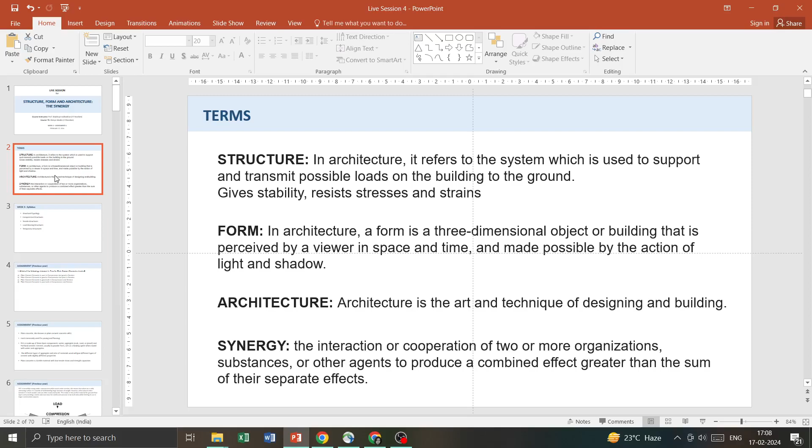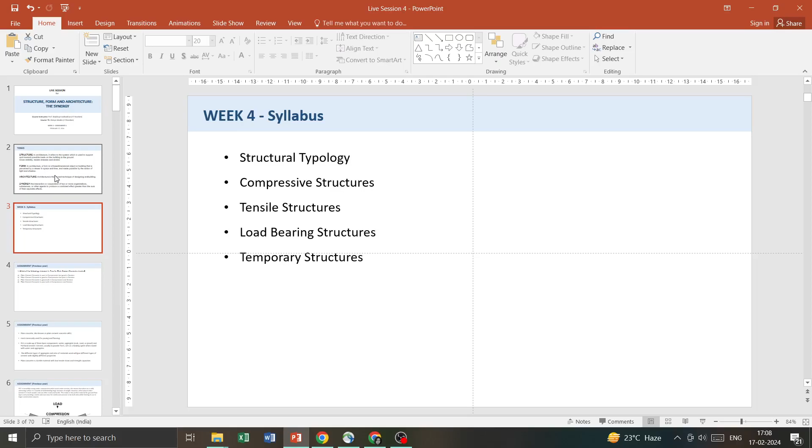Week 4 syllabus was structural typology, covered over 5 lectures. First was structural typology, second was compressive structures, third was tensile structures, fourth was load bearing structures, and fifth was temporary structures, in which scaffolding and raking was covered.

Without any further ado, we will start with the questions of Assignment 4. Which of the following statements is true for plain cement concrete structure? Plain cement concrete is poor in compression but good in tension. Plain cement concrete is good in compression but poor in tension. Plain cement concrete is good both in compression and tension. Plain cement concrete is poor both in compression and tension.

So what is plain cement concrete? Plain concrete, also known as plain cement concrete or PCC, is most commonly used for paving and flooring. PCC is made up of 3 basic components: water, aggregate (rock, sand or gravel), and cement. Cement, usually in powder form, acts as a binding agent when mixed with water and aggregates. The different types of aggregates and ratios of materials used give different types of concrete with slightly different properties. Plain concrete is a brittle material with low tensile strain and strength capacities.

PCC is incredibly strong under compression whilst weak under tension. This means that on a solid, unmoving surface, it is capable of withstanding huge amounts of weight. However, when placed under tension, it is much weaker and can often crack and buckle. This makes it the perfect material for ground floor layers and for providing a stable and even base for reinforced concrete to be built onto, while limiting its use in larger construction projects.

So what happens in PCC is that it has incredible compressive strength, meaning that if load is put on the PCC, it would be able to handle that load. But if PCC is put under tension, which means it's being stretched apart, it will buckle and crack. So it is weak under tension, which makes it a great layer for ground floors and for providing a stable base for RCC. But because of its inability to withstand tension, it is not that great to use as PCC alone in larger projects.

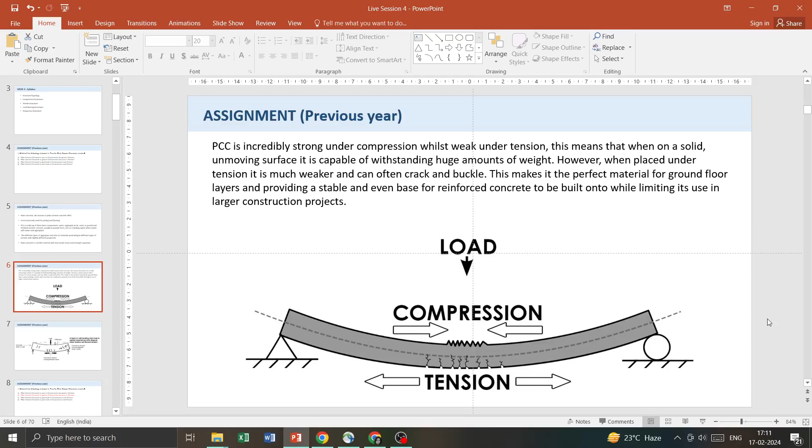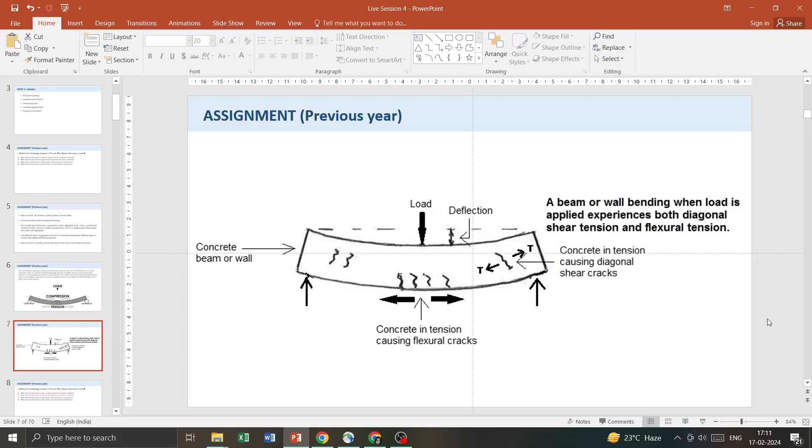This is another image which shows that when a load is put on a beam or wall, it experiences deflection. So when a load is put on a beam of, imagine, plain cement concrete, deflection occurs, and the concrete in tension causes cracks, while the concrete in compression only buckles from the top.

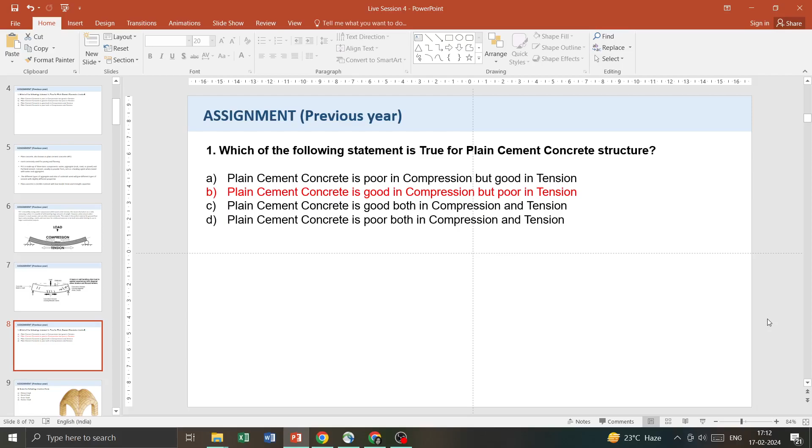So the question was, which of the following statements is true for plain cement concrete structure? The answer is that plain cement concrete is good in compression but poor in tension. It has good compressive strength and can take load, but it has bad tension. It is bad under tension, meaning that if concrete is pulled apart by any load, it will crack and break. It becomes brittle that way.

Ribbed vault: a ribbed vault is an architectural feature comprising a framework of crossed or diagonal arches or ribs - the skeleton of arches or ribs - on which masonry can be laid out to form a ceiling. Variations of ribbed vault were used in Roman architecture, Byzantine architecture, Islamic architecture, Romanesque architecture, and especially Gothic architecture.

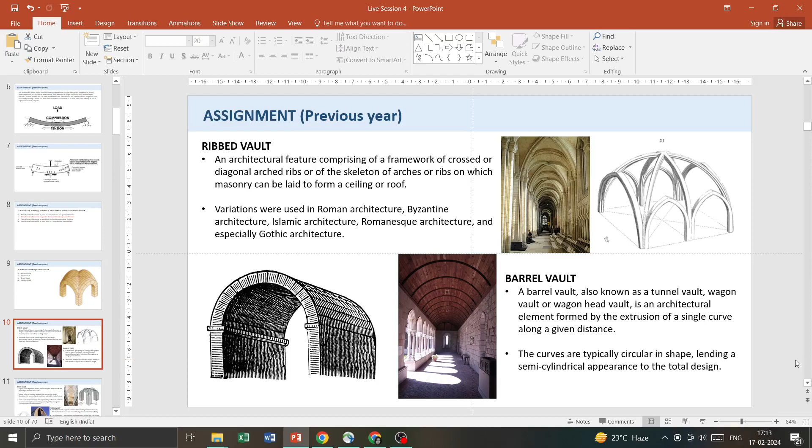Barrel vault, also known as tunnel vault, wagon vault, or wagon head vault, is an architectural element formed by the extrusion of a single curve along a given distance. So a barrel vault is basically one arch that is repeated, or stretched along a length, creating a barrel-like, semicircular structure. The curves are typically circular in shape, giving a semi-cylindrical appearance to the design.

Groin vault: a groin vault or groined vault is produced by the intersection at right angles of two barrel vaults. Imagine two semi-cylindrical vaults put at intersection with each other - the shape generated by that intersection at right angles is a groin vault. Groin refers to the edge between the intersecting vaults. Sometimes the arches of groin vaults are pointed instead of round. Groin vault construction was first exploited by the Romans, and it is difficult to construct neatly because of the geometry of the cross groins.

Then the Nubian vault. A Nubian vault is a type of curved surface forming a vaulted structure. The mud brick structure was revived by Egyptian architect Hassan Fathy. The technology is advocated as environmentally friendly and sustainable since it makes use of pure earth without the need of timber. One key advantage of the Nubian vault is that it can be built without any support or shuttering - the earth bricks are laid leaning at a slight slope against the gable walls in a lengthwise vault.

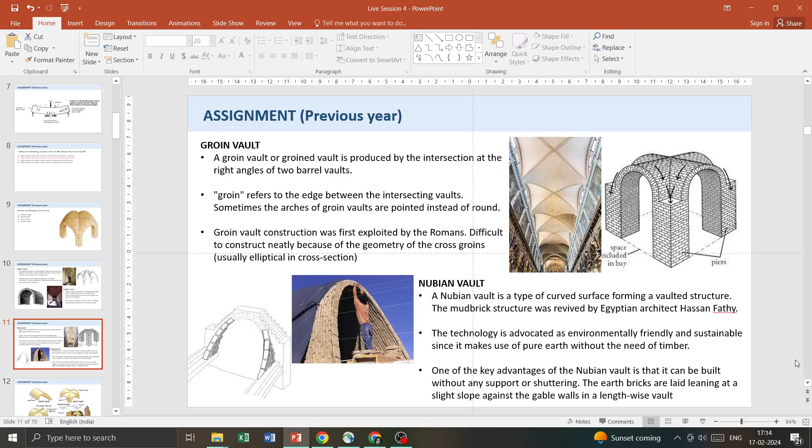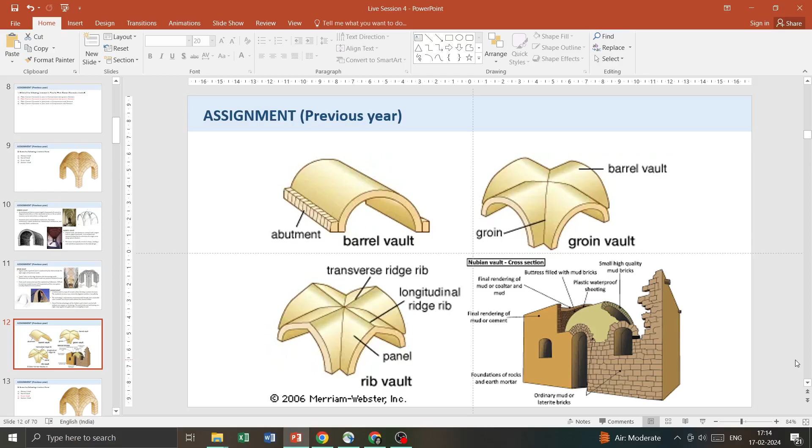So now adding all four images here: this is a barrel vault, that is a groin vault, and this is a rib vault, and this is a cross section of a Nubian vault. So coming back to our question - name the following structural form. This is a groin vault.

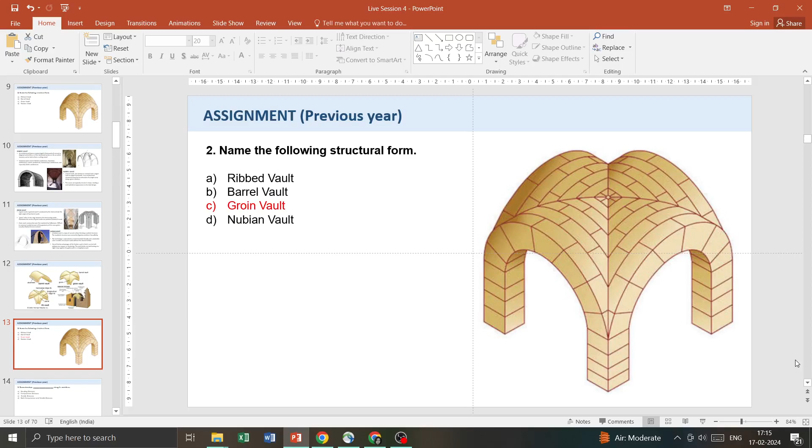Question number 3: a dome develops what along its meridian - bending stresses, compressive stresses, tensile stresses, or both compressive and tensile stresses? In domes, there are two types of forces that occur: meridional forces and hoop forces. Hoop forces are the concentric circles from the base of the dome to the top, and meridional forces are the meridians running from the center to the base of the dome.

Domes are self-supporting structures that take the form of an arch, distributing external loads around the sides and down to the foundations. They are tightly compacted by gravity, and external loads are carried by internally developed compressive forces. The analysis of a dome shell is concerned with two stresses: the stress acting in the meridional direction and the stress acting in the parallel, or hoop, direction. Hoops are parallel semicircles from the base of the dome to the top, and meridional forces run from the top of the dome to the base in the longitudinal direction.

In this image, red marks the meridional compressive force, dark blue marks the hoop compressive force, and light blue marks the hoop tensile forces. So the answer is that a dome develops compressive stresses along its meridians. In the case of a dome, compressive stresses are developed along the meridians, but along the hoops - the parallel circles to the base of the dome - both compressive and tensile stresses are developed.

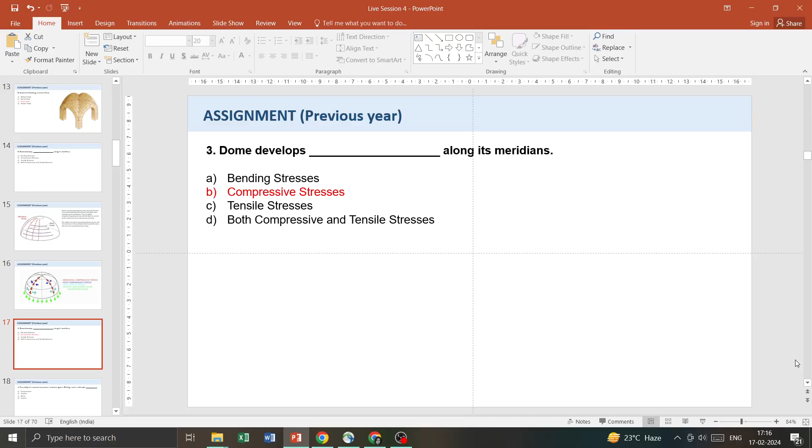Question number 4: the ability of a material to prevent structure against pulling load is referred to as compression, tension, shear, or torsion - the ability of a material to prevent structure against pulling load.

So let's go to the definitions. Compression force, or compressive force, occurs when a physical force presses inward on an object, causing it to become compacted. In this process, the relative positions of atoms and molecules of the object change. This change can be temporary or permanent depending on the type of material receiving the compressive force. So compressive force is when you push it together - when this push inward force is applied inward on an object.

Shear force is a force acting in a direction that's parallel to, or over the top of, a surface or cross section of a body, like the pressure of airflow over an airplane wing. The word shear refers to the fact that such a force can cut or shear through the surface or object under strain.

Then tension - tension is described as a pulling force. It's a force that is pulling the object.

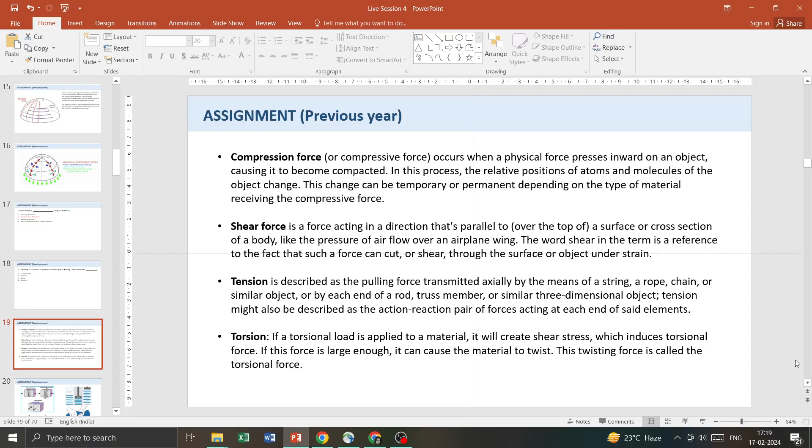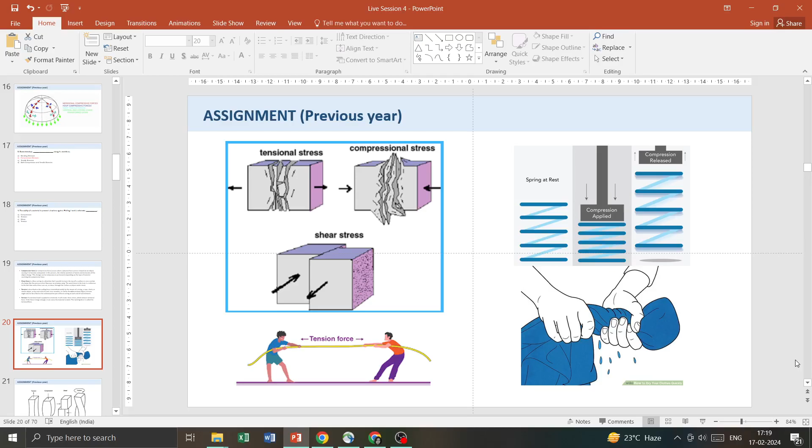So here are some examples. In tension stress, the object is pulled apart and it breaks. In compression stress, the object is pushed together and it breaks. In shear stress, it can shear. And a few more examples of compression, tension, and torsion.

This image explains all four types of forces very clearly: tension, compression, shear, and torsion. In tension, the object elongates. In compression, the object compacts. In shear, the object shears or divides. In torsion, the object twists.

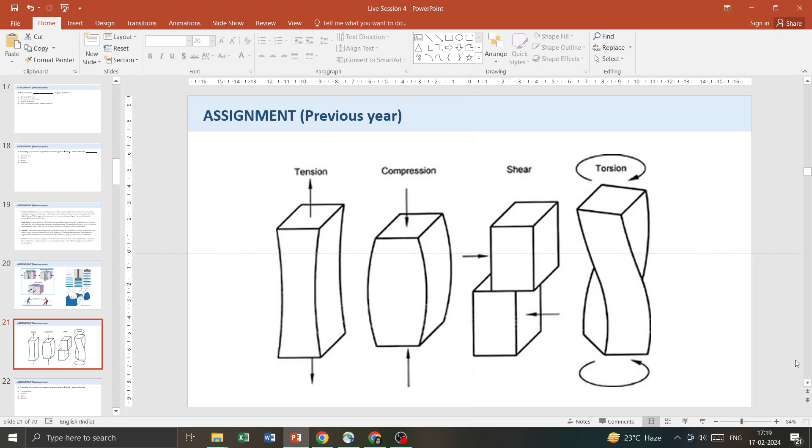So our answer is: the ability of a material to prevent the structure against pulling load is referred to as tension. So here we are talking about pulling load. A material which can prevent the structure from breaking against a pulling load is tension.

Like we discussed in the previous question, concrete or PCC has bad tensile strength. If a pulling load is applied on it, since it has bad tensile strength, it will become brittle or create cracks. However, it has good compressive strength, so if it is pushed together, it will be able to take up that load. Question number 5.

The McCormick Place in Illinois is an example of: trussed tensile structure, pneumatic tensile structure, cable suspended tensile structure, or stage tensile structure.

So what is a trussed tensile structure? A truss is a structure that consists of members organized into connected triangles so that the overall assembly behaves as a single object. Trusses are most commonly used in bridges, roofs, and towers. A truss is made up of a web of triangles joined together to enable the even distribution of weight and the handling of changing tension and compression without bending or shearing.

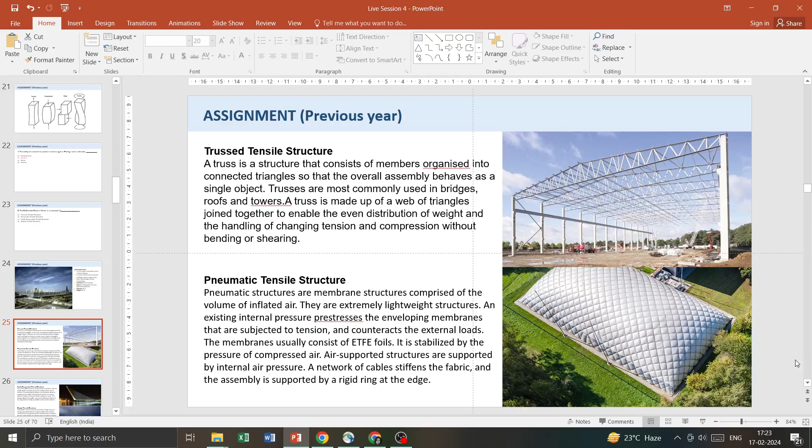So what happens in a pneumatic structure is that it's a volume of inflated air. They are extremely lightweight structures, and the structure is maintained by creating pressure through internal air pressure. It's a fabric, usually made of ETFE foil, and the shape is maintained by internal air pressure. They are membrane structures, and that's why they are tensile structures.

Cable suspended tensile structures: the main pillars act as compression members, but the whole load is carried out by the cables, which are in tension. A suspended structure is a structure supported by cables coming from beams or trusses which sit atop a concrete center column or core. The design allows the walls, roofs, and cantilevered floors to be supported entirely by cables and the center column.

So what happens in a cable suspended tensile structure is that the main cables or main pillars are compression members, and the whole load is carried out by the cables, which come from the compression member or compression column to the structure.

For example, in bridges, it's a suspended structure supported by cables coming from beams or trusses which sit atop a concrete center column or core. So there would be one column or core of concrete, and these cables come out of that structure and support the base or wall. This design allows the walls, roof, and cantilevered floors to be supported entirely by cables and a center column. The entire load or floor is supported by the cables. The cables have tensile strength which support the whole load, while the pillar only has compressive strength.

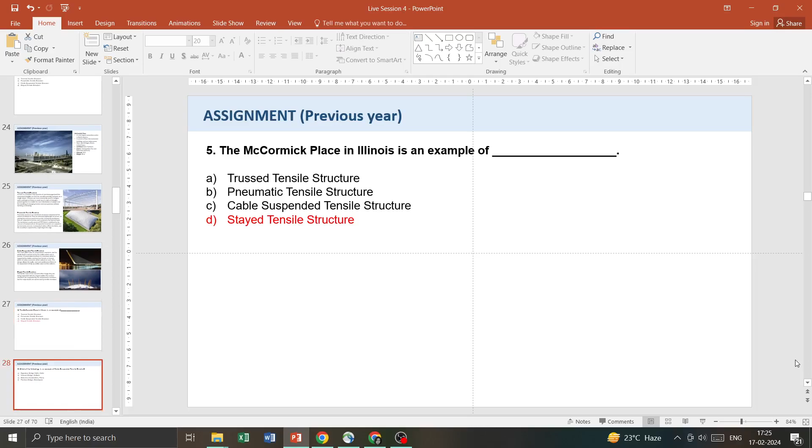As mentioned earlier, in cable suspended tensile structures, the main pillars act as compression members, but the whole load is carried by the cables which are in tension. A suspended structure is supported by cables coming from beams or trusses which sit atop a concrete center column or core. This design allows the walls, roofs, and cantilever floors to be supported entirely by cables and a center column.

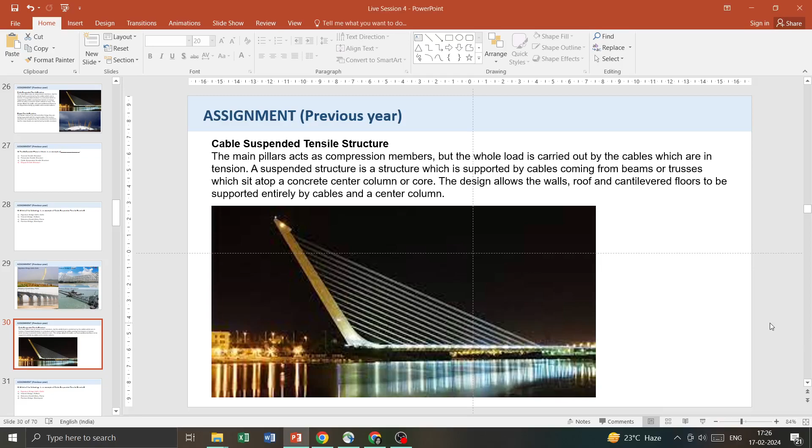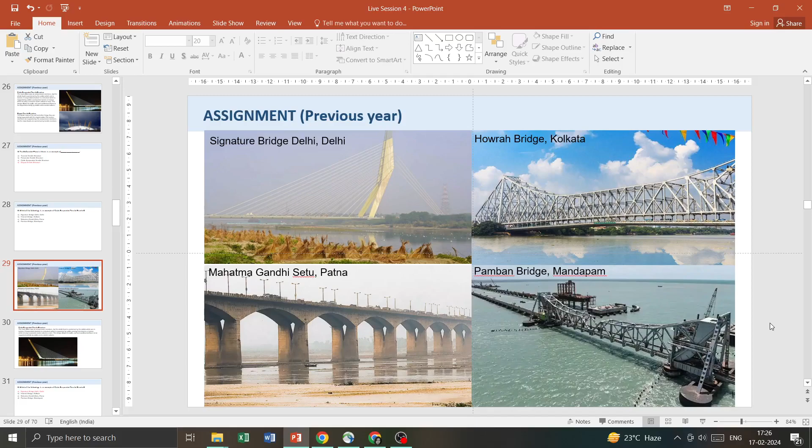So it's evident from these images that the Signature Bridge, Delhi is a cable suspended tensile structure, and not the others, because Howrah Bridge and Pamban Bridge are trusses, and Mahatma Gandhi Setu looks like it's built out of concrete or masonry. So the answer is Signature Bridge, Delhi.

In a cellular wall structure, the external walls form the boundaries of the building and the internal walls are used to divide the space. They are connected as shown in the figure to form a cellular wall arrangement. All the walls are load bearing or structural walls.

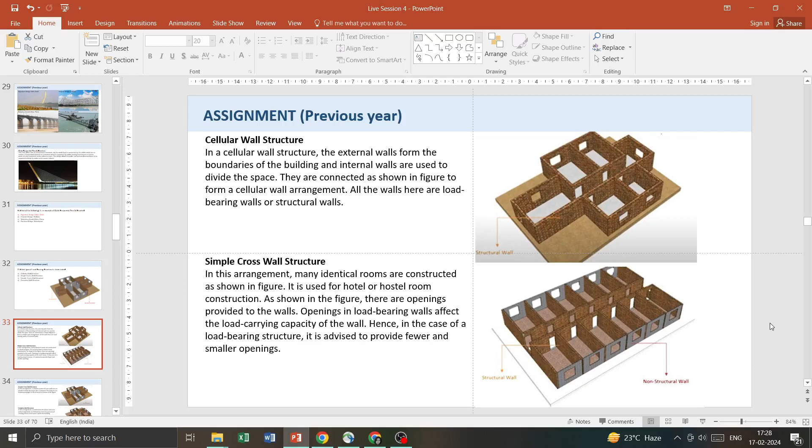In simple cross walls, it's usually used where many identical rooms can be constructed together, and openings are provided on the walls. These openings in load bearing walls affect the load carrying capacity, so it's advised to provide fewer, smaller openings. Non-structural walls are added where openings are needed, while other elements are provided with structural walls. This is usually used in hotel or hostel room construction where identical rooms need to be constructed for longer lengths.

Then, double cross wall structure: in this arrangement, a complex system of cross walls set parallel to both major axes is adopted, which helps use maximum daylight in the structure as shown in the figure. In single wall structure, the structural wall runs mainly in one direction, while in double cross wall it runs in both directions, with both directions having non-structural and structural walls.

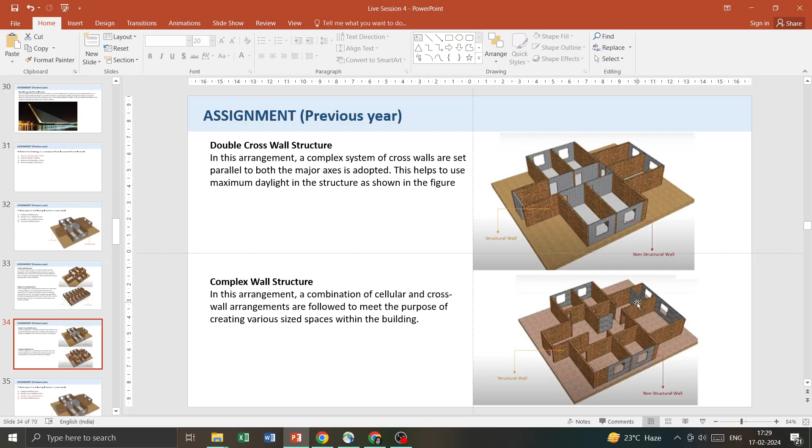Then, complex wall structure: in this arrangement, a combination of cellular and cross wall arrangements are followed to meet the purpose of creating various sized spaces within the building. So our answer is double cross wall structure - this is a double cross wall structure.

In a load-bearing structure, the load-bearing members are walls. A load-bearing wall or bearing wall is an active structural element of a building; it bears the weight of the elements above it, resting upon it by conducting its weight to the foundation structure.

The entire weight of the building is shifted to the wall, which then shifts the weight to the foundation, and the entire building is made up of walls.

Shell structures. A shell is a thin curved plate structure which is shaped to transmit applied forces by compressive, tensile, and shear stresses that act in the plane of the surface.

Pneumatic structures. Pneumatic structures are membrane structures comprised of the volume of inflated air. They are extremely lightweight structures, and existing internal pressure pre-stresses the enveloping membranes that are subjected to tension and counteracts the external loads.

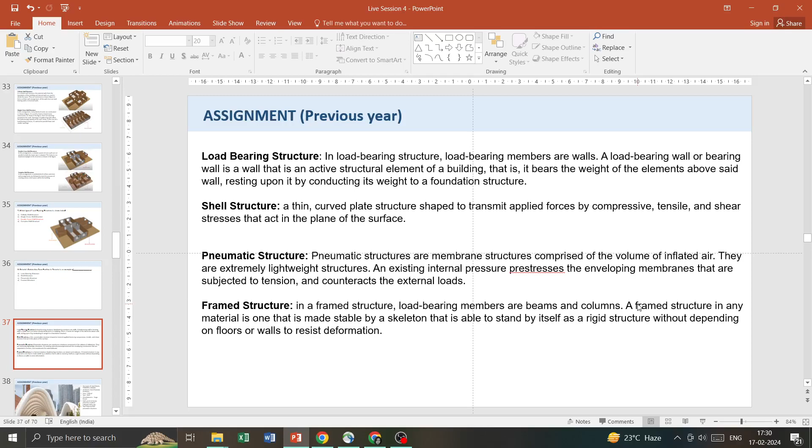Frame structure. In a frame structure, load-bearing members are beams and columns. A frame structure in any material is one that is made stable by a skeleton that is able to stand itself, a rigid structure without depending on floors or walls to resist deformation.

This is how the Ontario Celebration Zone Pavilion in Toronto looks like. It's located on the east coast of Lake Ontario, Toronto, Canada. The architect was Hariri Pontarini Architects.

The area is 1200 meters square. It was built in 2015. The manufacturers of this were Serge Ferrari. It is built out of air beams joined by a quilted inflated fabric skin,

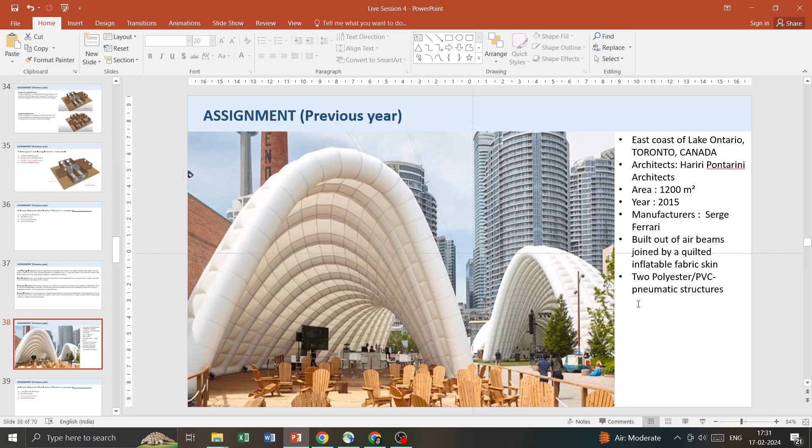and it's a pneumatic structure made up of PVC. So our answer is pneumatic structure. It's a pneumatic structure.

Question number 9. A massive scaffolding structure mounted on a bridge or platform supported by a pair of towers, which normally run back and forth on parallel tracks, is called: raker, transom, gantry, or base plate.

So what is a raker? Rakers are a bracing system that transfer forces from the shoring wall to a more stable zone.

Transoms are horizontal load bearing scaffold components for supporting planks. Gantry is a bridge-like overhead structure with a platform supporting equipment such as crane, signals, or cameras.

Base plate is mainly used to spread the load onto the sole plates. All uprights or standards of a scaffold are to be mounted on a steel base plate.

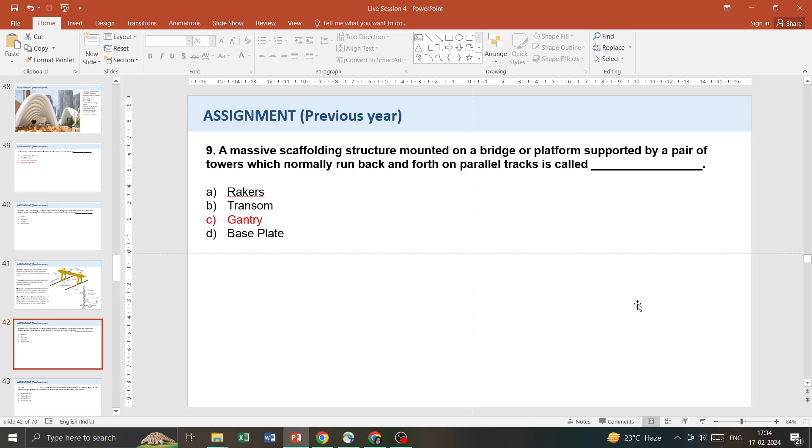It's a massive scaffolding structure mounted on a bridge or platform supported by a pair of towers which normally runs back and forth on parallel tracks. So it is called gantry.

Question number 10. This is a system of providing temporary supports to the party walls of two buildings where the intermediate building is to be pulled down and rebuilt: raking shore, flying shore, dead shore, or underpinning.

So what is raking shore? In raking shore, inclined members, known as rakers, are used to give lateral support to walls. This is a wall, and this is a raker which is used to give lateral support to the walls at 45 degrees, and the rakers can vary from 45 to 75 degrees angle.

Flying shore is a system of providing temporary supports to the party walls of two buildings where the intermediate building is to be pulled down and rebuilt.

What happens in flying shore is, for example, there are three buildings and the building in the middle is to be pulled down. So we provide a flying shore in which the shores do not really touch the ground, but rather there is a horizontal member between the ends of the two buildings which is supported by two shores, and then the building is pulled down. So that is what a flying shore is.

And in dead shore, what happens is that, for example, in a vertical member like a wall, you need to provide an opening. So dead shore is provided. It's a straight shore which is provided on the lower part of a wall, so that it can be opened and an opening can be created, or a defective load bearing area can be rebuilt.

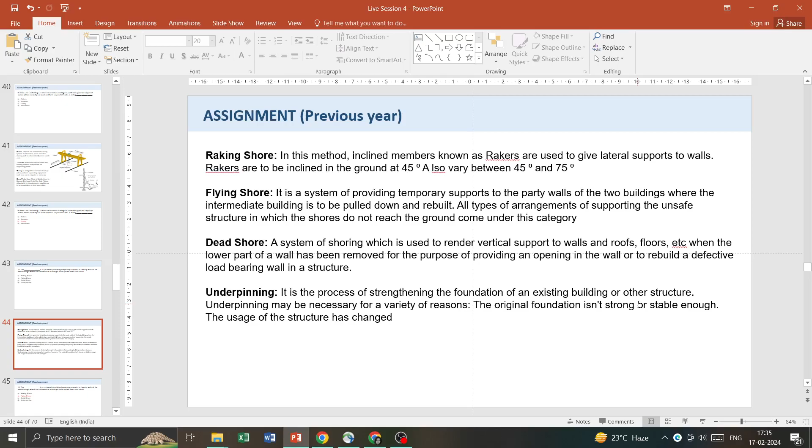So our answer is that flying shore is a system of providing temporary supports to the party walls of two buildings where the intermediate building is to be pulled down and rebuilt.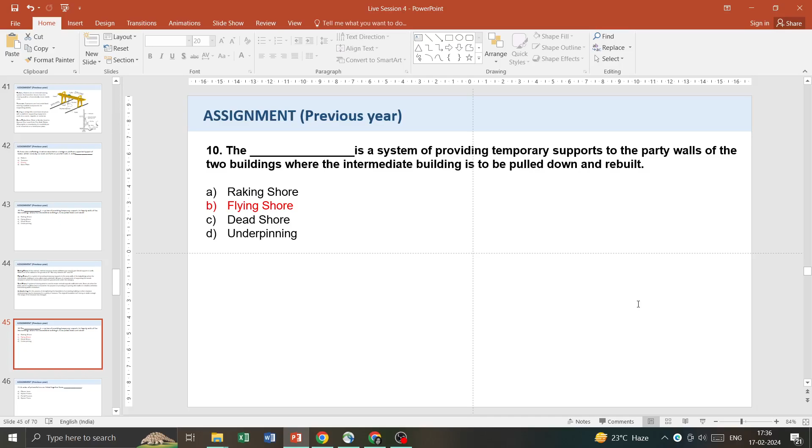A series of prismatic trusses linked together forms planar truss, space frame, portal frames, or space truss. Planar truss is one where all the members and nodes lie within a 2D plane. Space frames are 3D lattice structures made up from linked pyramids or tetrahedra into 2-layer or 3-layer triangulated frameworks. Portal frame buildings comprise a series of transverse frames braced longitudinally, with primary steelwork consisting of columns and rafters forming portal frames and bracing. Space trusses are 3D structures with longitudinal members connected at their ends by hinges assumed to be frictionless. So the question was: a series of prismatic trusses linked together forms what?

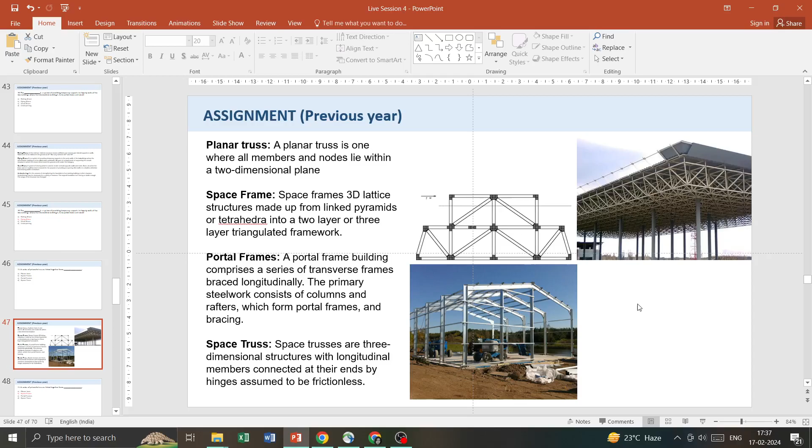The answer is space frame. I've added an image of a space frame in the top right corner. It's a 3D lattice structure made up of different linked pyramids or tetrahedron shapes. So the answer is B, space frame.

Question number 12. Circumferential hoop stress developed in a dome is: compressive in nature, tensile in nature, shear in nature, or both A and B.

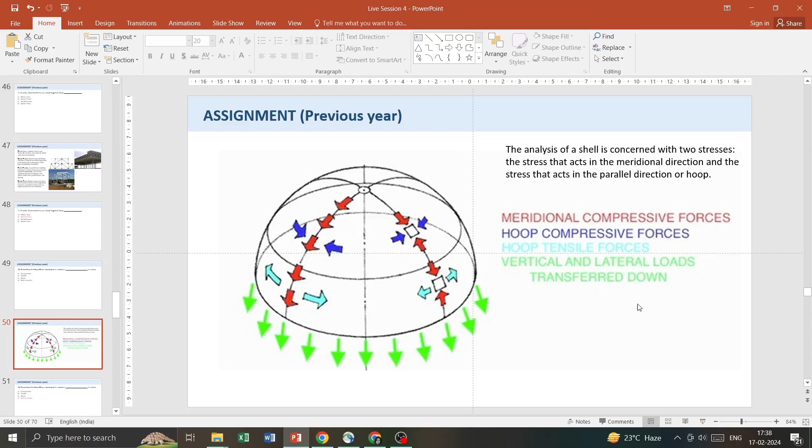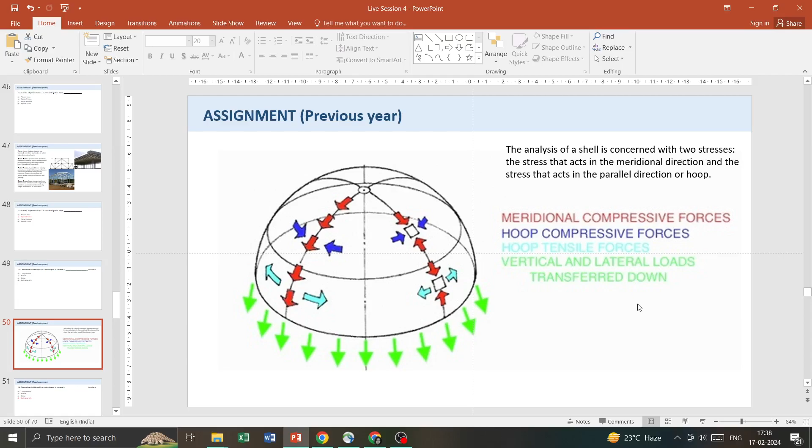As I explained before, the analysis of a dome or shell is concerned with two kinds of stresses: the stresses that act in the meridional direction and the stresses that act in the parallel or hoop direction. The meridional stresses are compressive forces, while the hoop stresses are both compressive and tensile forces. Compressive forces occur on top, and in the hoops we have both compressive and tensile forces. So our answer will be both A and B.

Circumferential, as in circumference, dealing with the circumference, or you can say the hoop of the dome. So the circumferential hoop stress developed in a dome is both compressive and tensile in nature.

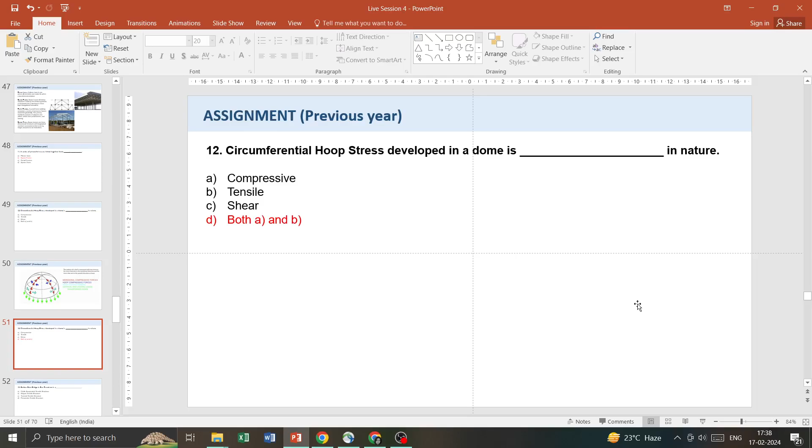Question number 13. Golden Gate Bridge in San Francisco is a cable suspended tensile structure, stayed tensile structure, trussed tensile structure, or pneumatic tensile structure.

This is what the Golden Gate Bridge looks like. It's located in San Francisco, Marin County, USA. The total length of the bridge is 2,737 meters. Construction started in 1933. The architects of Golden Gate Bridge are Joseph Strauss, Charles Alton Ellis, and Irving Morrow. It has 67 meters of clearance below. It was opened in 1937, and the height of the bridge is 227 meters.

In a cable suspended structure, the structure is supported by cables coming from beams or trusses atop a concrete center column or core. In stayed tensile structures, the whole mass of the roof and other elements is supported by stayed cables. The tension members are supported by compressive members, but the major loads are carried by tensile members.

A trussed tensile structure is a truss, a structure made of members organized into interconnected triangles so the overall assembly behaves as a single object. Trusses are most commonly used in bridges, roofs, and towers. Pneumatic tensile structures are membrane structures comprised of the volume of inflated air, and they are extremely lightweight structures. The existing internal pressure pre-stresses the enveloping membranes, which are subjected to tension that counteracts the external loads.

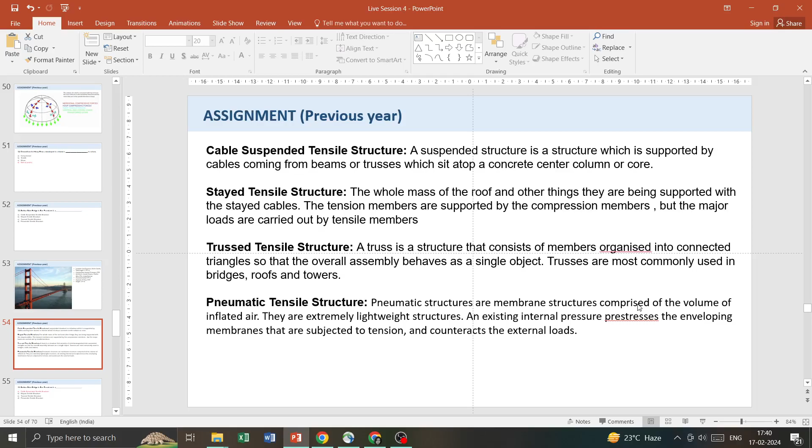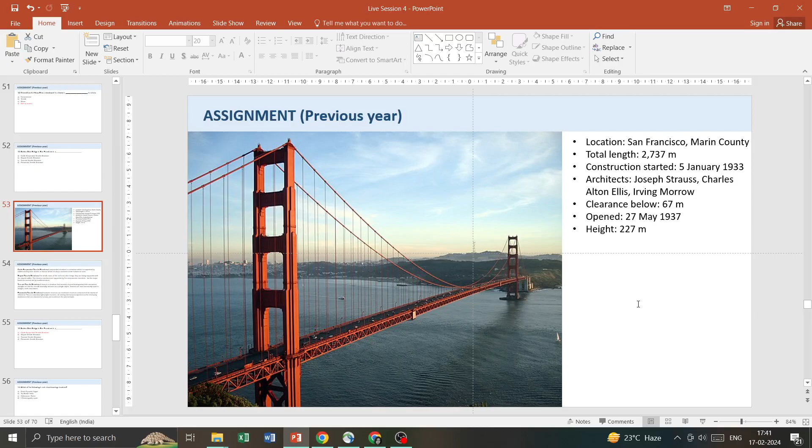Our answer is: Golden Gate Bridge in San Francisco is a cable suspended tensile structure. As you can see, these are the main compressive members of the bridge, and then we see the cable taking the load of the entire bridge. So it's a cable suspended tensile structure.

Question number 14. Which of the following is not a load bearing structure? Great Pyramid, Egypt; Taj Mahal, India; Colosseum, Rome; or La Oceanografic, Spain.

The Taj Mahal is a load-bearing structure covered entirely in marble. The Pyramids of Giza is also a load-bearing structure, and the Colosseum of Rome is also a load-bearing structure. So our answer is La Oceanografic, Spain.

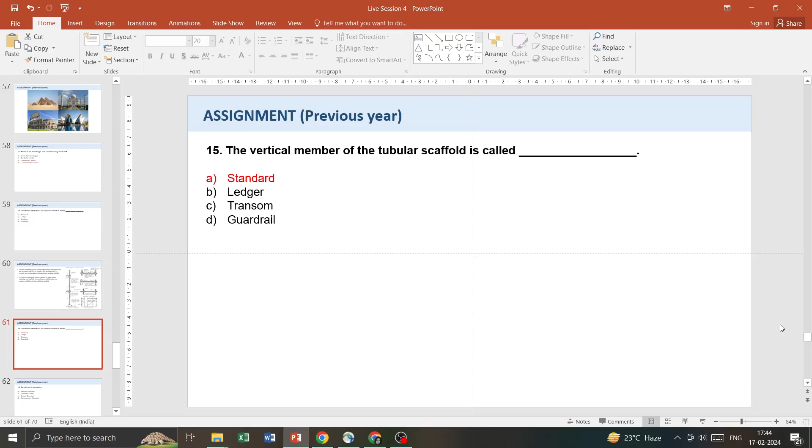Question 16. Is a barrel vault basically a twisted structure, geodesic dome, tensile structure, or a compressive structure? A barrel vault is also known as tunnel vault or wagon head vault. It is an architectural element formed by the extrusion of a single curve along a given distance. The curves are typically circular in shape, creating a semi-cylindrical appearance of the total design.

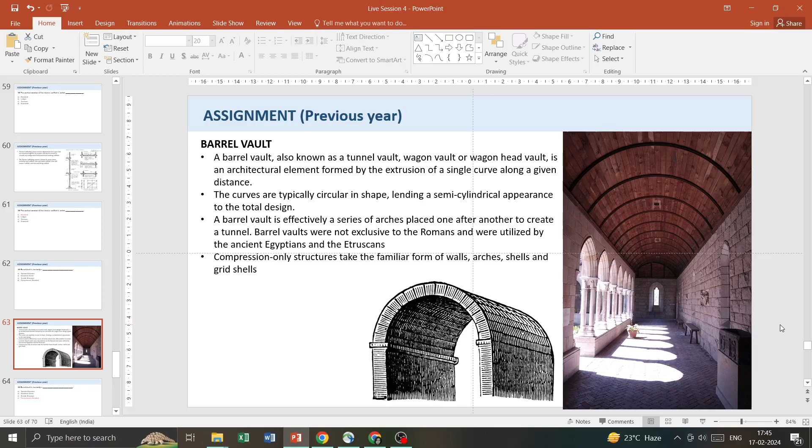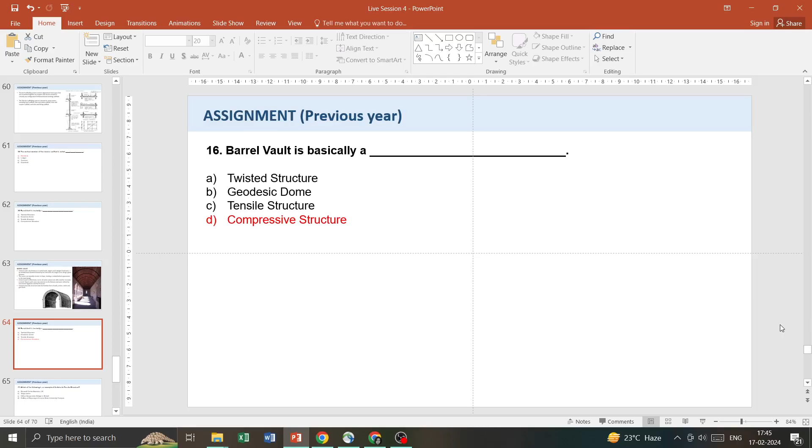A barrel vault is effectively a series of arches placed one after another to create a tunnel. Barrel vaults were not exclusive to the Romans but were also utilized by the ancient Egyptians and the Etruscans. They are compression-only structures, taking the familiar form of walls, arches, shells, and grid shells. So the answer is that a barrel vault is a compressive structure. They have high compressive strength and have been used as compressive structures throughout the history of architecture.

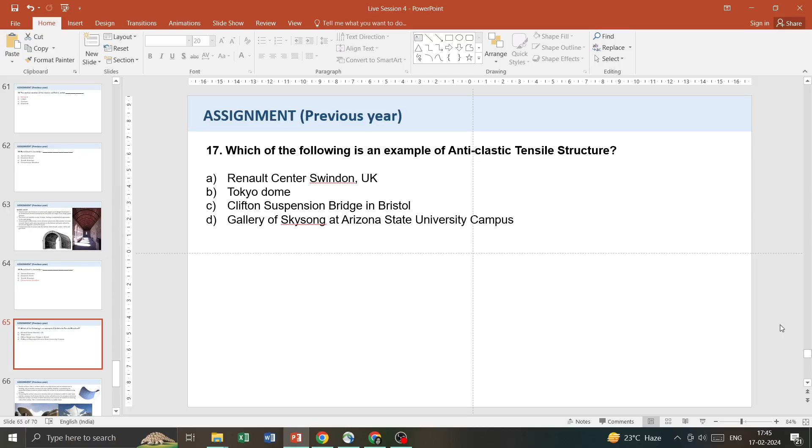Question 17. Which of the following is an example of an anticlastic tensile structure: Renault Center Swindon UK, Tokyo Dome, Clifton Suspension Bridge in Bristol, or Gallery of Skysong at Arizona State University campus?

Tensile surfaces, which carry only tension and no compression or bending, rely on double curvature for their stability. This stability is provided by the opposition of the two curvatures, which enable the surface to be tensioned without losing its form. Tensioning the surface reduces its elasticity and so its tendency to deform under load, and the curvature itself means the surface will deform less for any given extension.

Anticlastic surfaces are those in which the centers of curvature are located on opposing sides of the surface. This is commonly described as a saddle shape. So anticlastic surfaces are basically curved surfaces in which the centers of curvature are on opposite sides.